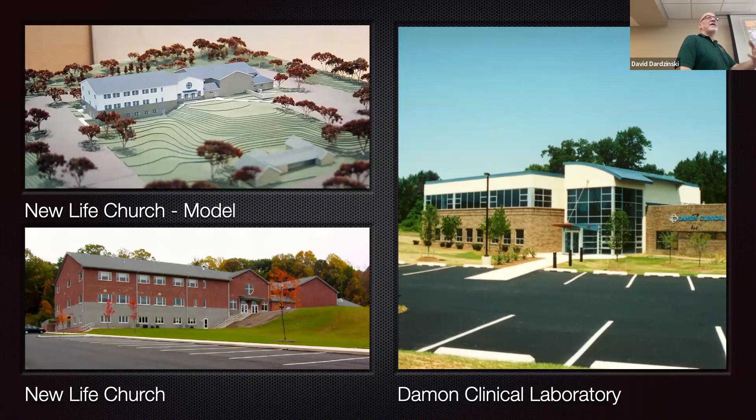This is an office building in Little Falls, New York. Car dealership—this is what it looked like before. Interesting story, there's my sketch there. After...

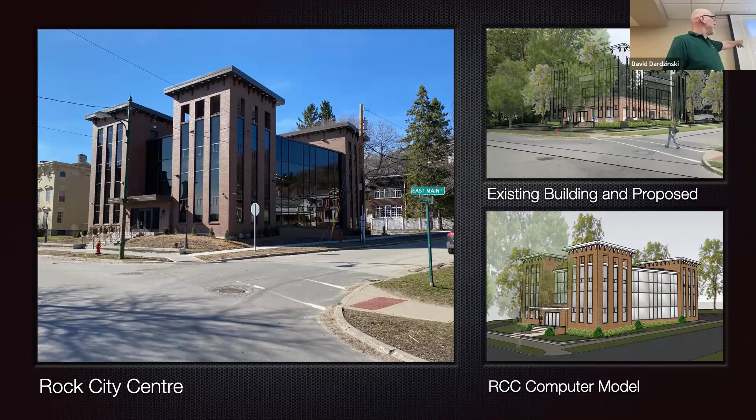And I worked for some large corporations, Toll Brothers. I was on a 200-unit, 300-acre development housing, and this was the original barn on the property. So we renovated that into a clubhouse.

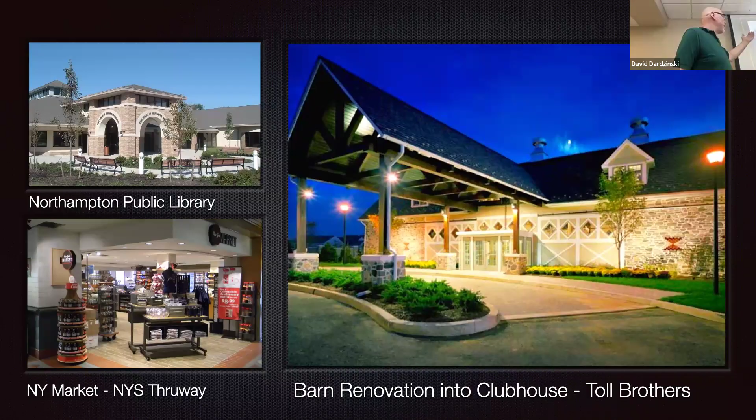Apartment renovation. There was a fire there, before and after. It's a duplex, well, two flats—apartment on the first floor, apartment on the second floor with a roof deck. That's on the Erie Canal, that hasn't been built yet. And there's a couple of apartment buildings, I think 4 apartments on an empty lot in Lambertville, New Jersey, on the Delaware River.

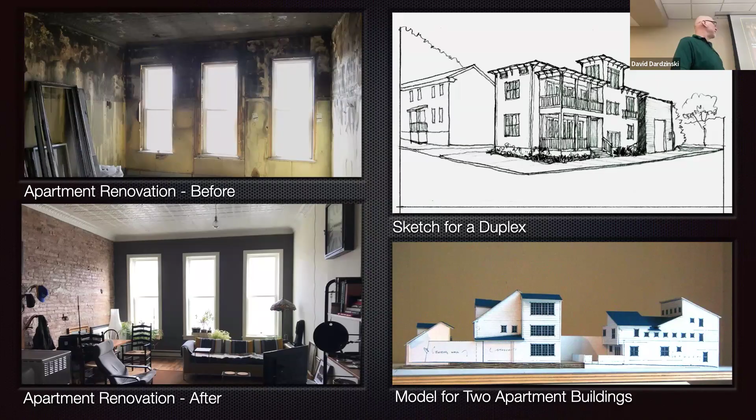This is a land bank project, Greater Mohawk Valley Land Bank. It's a trailer park, it's one of the existing trailers. They got a grant to replace them with zero energy modular houses. So what we were able to do, the state helped with, and the land bank, we converted their heat money—the money they're spending on heat and electric—because the zero energy modulars have no bills for heating or electric.

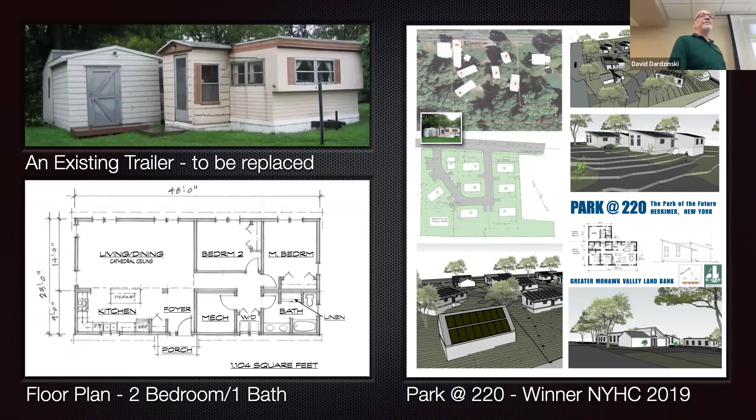Solar panels on the roof, some battery backup. So that became their mortgage payment. So instead of paying for heat, they're buying a house with that money. And that's under construction now.

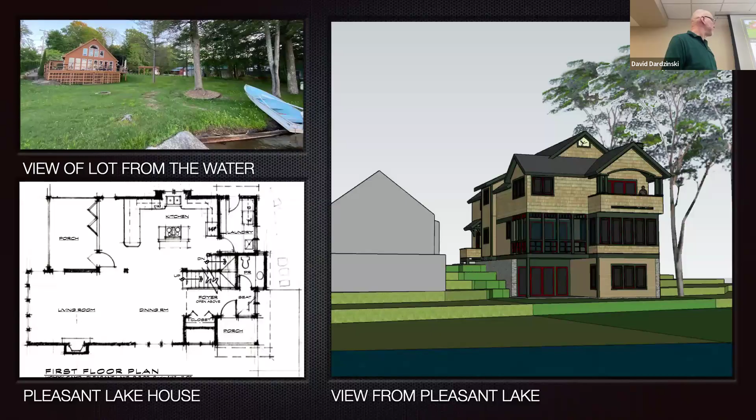So I present that to you because I've worked all over the country. I've worked outside the country. And I think, in my opinion, what Bruce Brownell has done with Adirondack Alternate Energy surpasses what I've done.

Bruce is sort of a local legend and a passive solar energy pioneer. Passionate about sustainable forms of energy, he has spent the last 60 years designing, constructing, and studying passive solar buildings, identifying the monetary and health benefits, and then sharing and educating students, clients, and the general public.

Bruce was born in Edinburgh, New York, which is inside the Adirondack Park on Great Sacandaga Lake. I don't know if you're familiar with that. It's north of Gloversville, Amsterdam.

He was born to a lumberman whose grandfather was also a lumberman. His grandfather had a mill on the Sacandaga River before the reservoir was flooded and became a lake. His father started a lumber business, Brownell Lumber, and Bruce worked there as a young kid. He also experienced construction firsthand because his father started building camps for vacationers coming up from downstate—two-bedroom cabins on stilts along the lake shore. Bruce was involved in that from an early age.

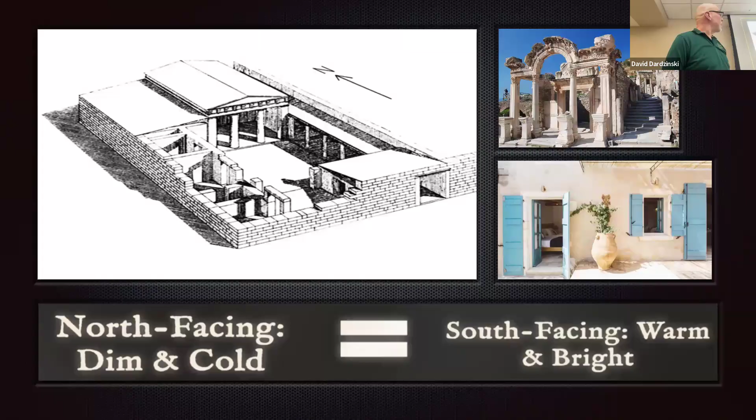The hypocaust transformed the building itself into a giant thermal battery, storing energy and releasing it slowly long after the fires died down. The Romans harnessed engineering mass and controlled airflow design, did not just heat a room, it heated 100,000 square feet at once with a single centralized system, which is sort of the precursor to our furnaces and ductwork stuff we're doing now.

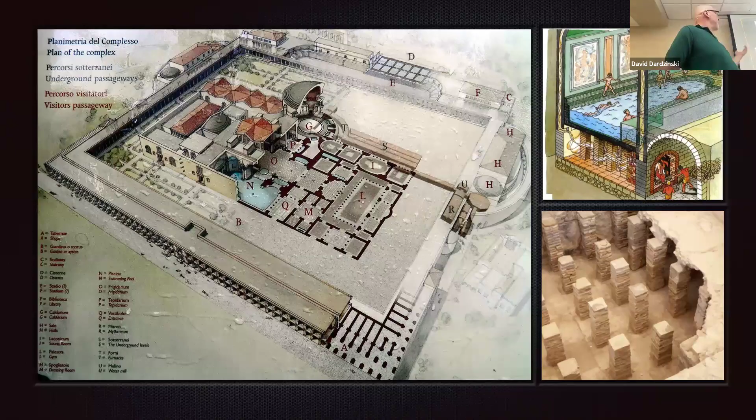So fast forward 1956, Felix Trombe took the ancient ideas and designed a wall using concrete or masonry facing south and placing just behind a layer of glass. Sunlight streams through the glass and heats the wall. It then slowly transfers the warmth and releases it long after sunset, smoothing out temperature swings without a furnace.

Field tests from the late 1950s and early 60s showed that a Trombe wall supplied between 60 and 75% of a home's winter heating demand in a typical temperate climate. All this without any moving parts or complex controls. The wall's mass acted like a battery, storing solar energy, then letting it trickle into living spaces as the air cooled outside.

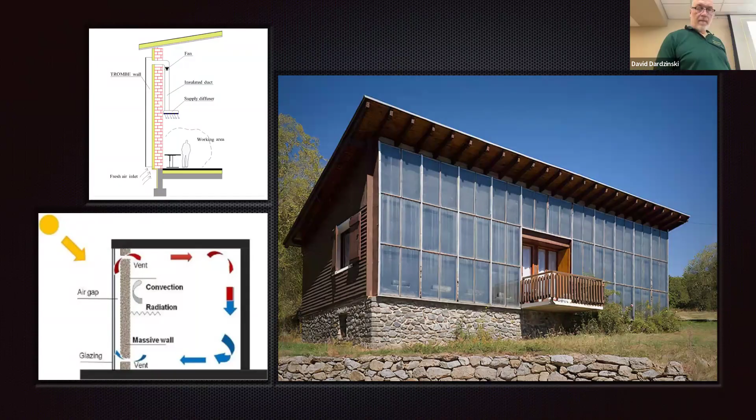Which brings us to the mid-60s and Bruce Brownell's designs. Bruce combined the ancient Greek practice of orienting to the southern sun and adding thermal mass storage pioneered by the Romans and advanced by Felix Trombe, where he also added the vision to make use of emerging technologies in building insulation and envelope sealing. This enabled him to reduce the overall heating demand.

Now, the house only needed occasional supplemental heat on the harshest days, which could be accomplished with a fire in a wood stove for a few hours. And this heat also would be stored in the heat energy battery.

Currently, with Bruce's design and the amount of insulation and sealing we have in the houses, we're at 15%, not 33% of glass on the south. We don't need that much, and it just overheats in the summertime.

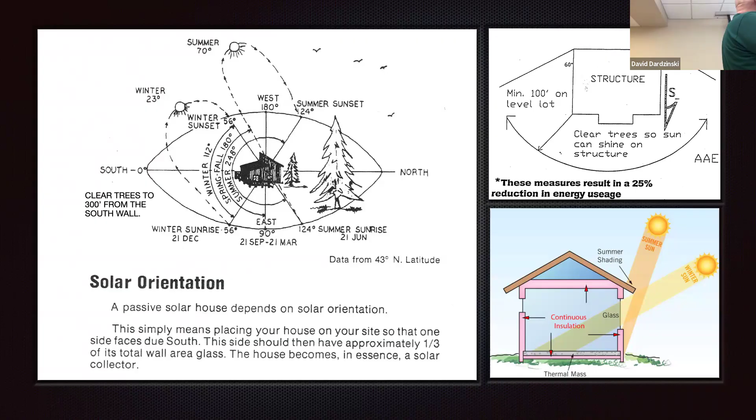And then there's a little section here. We do an envelope. Now, this isn't ours, but we do an envelope all the way around the living space, underneath the slab, walls, and we do the roofs. So we'll get to that next. But you can see where the winter sun comes down, comes through, heats the area. Summer sun, it's blocked by overhangs and just a steep angle.

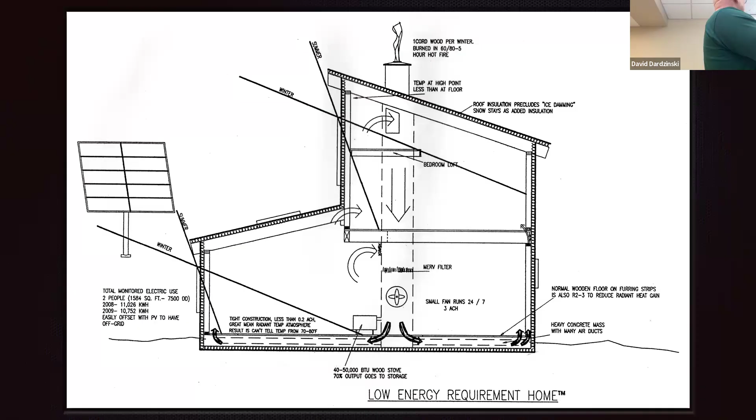So that's it. Basically, it goes 24/7. The fan runs 24/7. So the mass moderates the house. Typically, it stays between 68, 72 degrees year round. Now with climate change, summer's getting hotter. We've been adding some heat pumps. We put a coil in the air shaft for the heat pump to cool it down.

For the previous 40, 50 years, all you had to do was open the windows at night. It would cool the house down, cool the battery down, get up in the morning, close the windows, and it would stay cool because the battery's been cooled down. It's going to take the heat back out. But when it doesn't go below 78 or 80 degrees, that's as low as it's going to go. If that's what it says outside, that's what it's going to be inside.

So I've done a handful already of additional heat pumps. We did one geothermal. I think that was overkill, but.

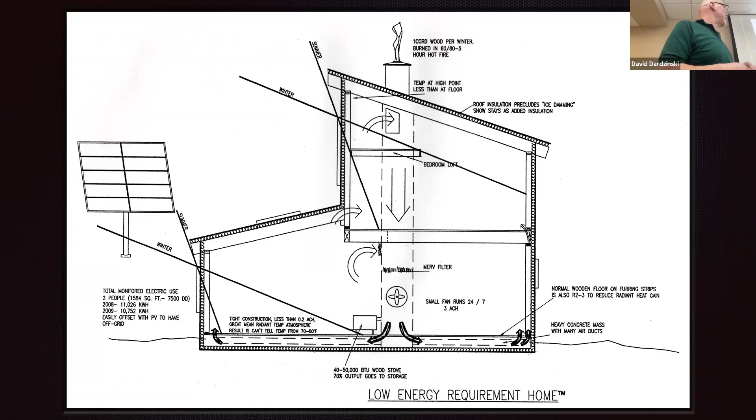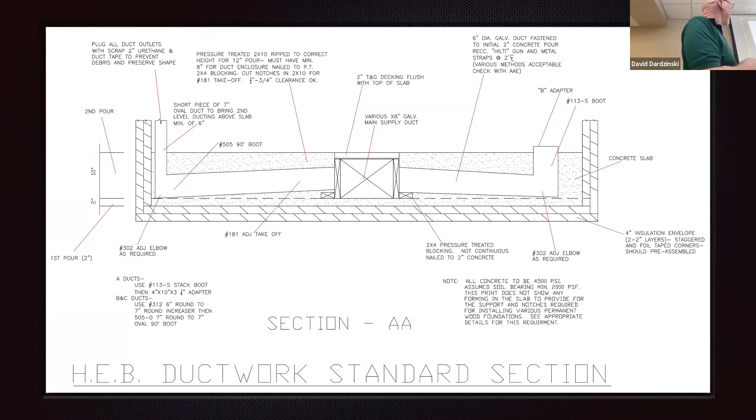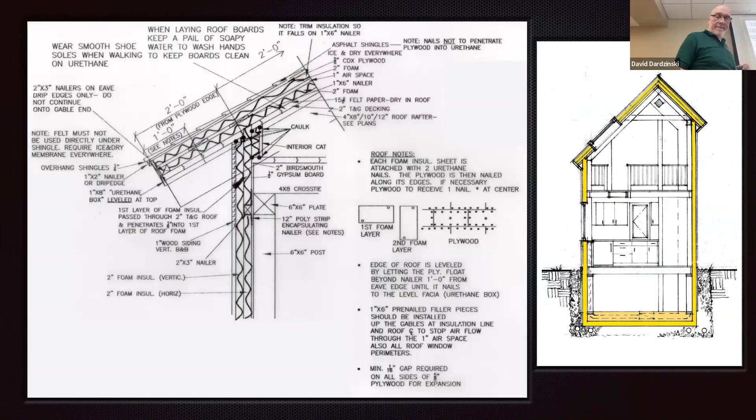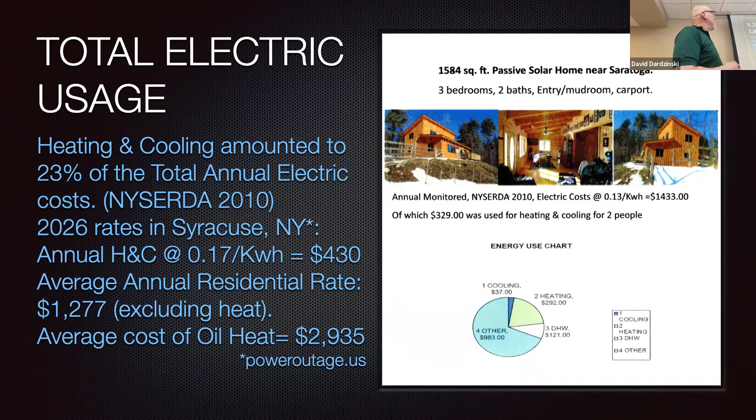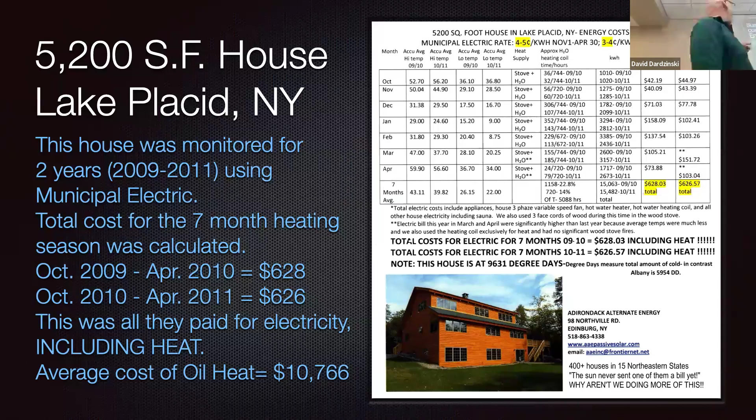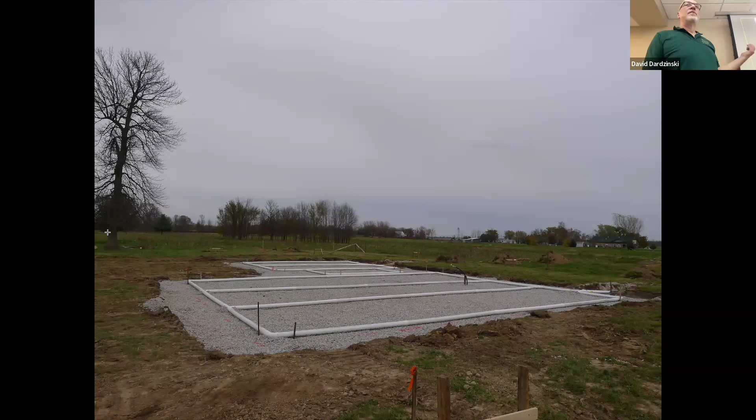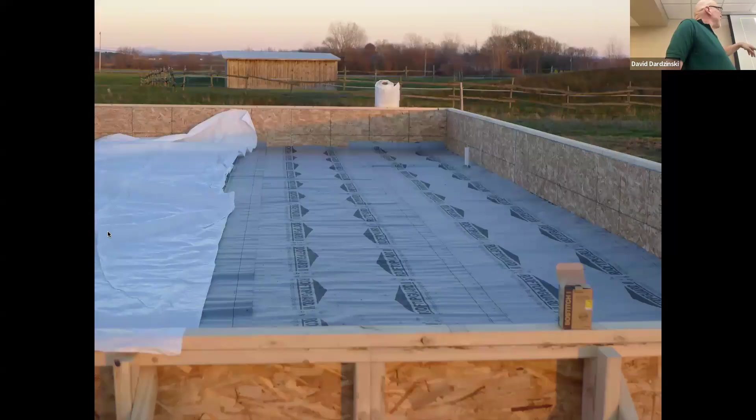Okay, so this is, I'm gonna say, about a 2,800 square foot house. So this is where we start. That's usually 8 to 12 inches of crushed stone with a drainage system on top of it. From there, we'll form up, put down a vapor barrier. This sheet is to keep stuff dry.

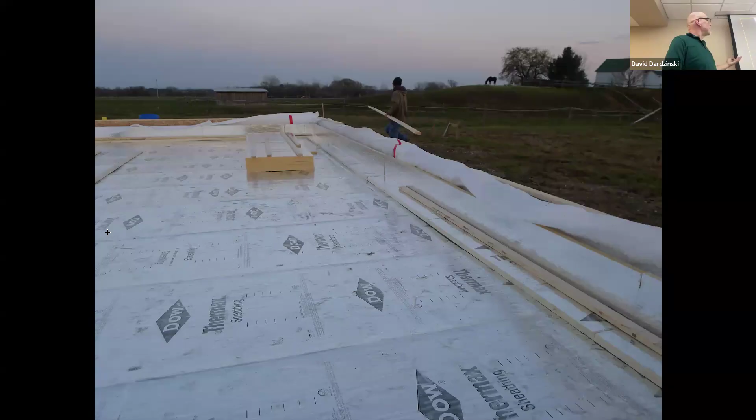Now we put down 2 layers of 2-inch rigid polyisocyanurate. So that's 4 inches total, which is roughly 28, 32 R rating. And you can see it's running up the sidewall there. See it going up there? Because that's going to continue right up the house. It's continuous.

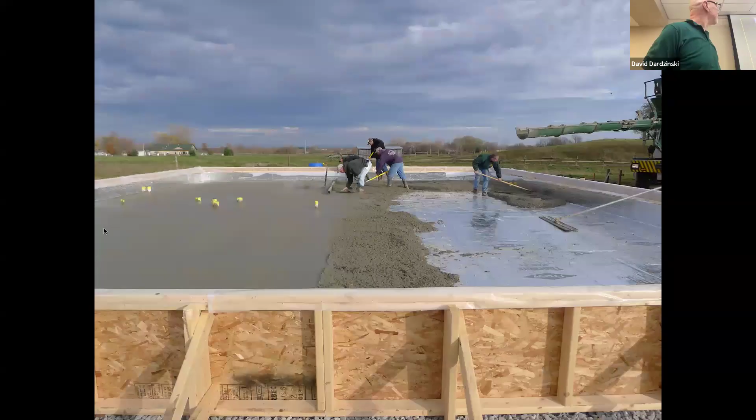So now they're putting down the 2-inch slab that the ductwork's going to be mounted on. So this is 2-inch all the way around. You can see there's some drains in there already for the plumbing.

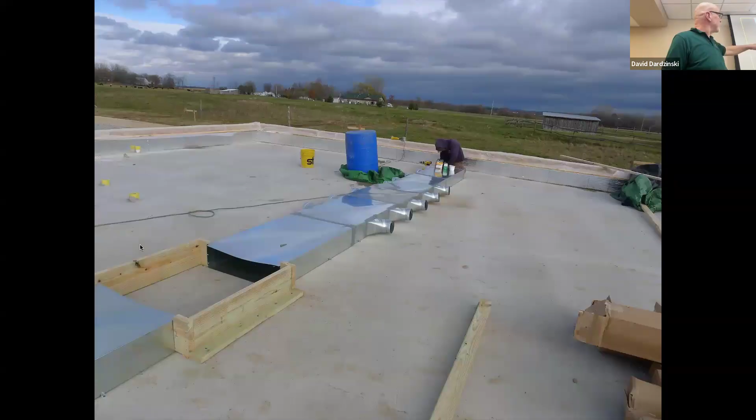So now the slab's down, and this right here is the return air shaft, roughly in the middle of the house as best we can do. This is the main duct going out here, and you can see all the takeoffs there that will run out to the exterior walls and then go up, whether go into this floor or go up to the upper floor.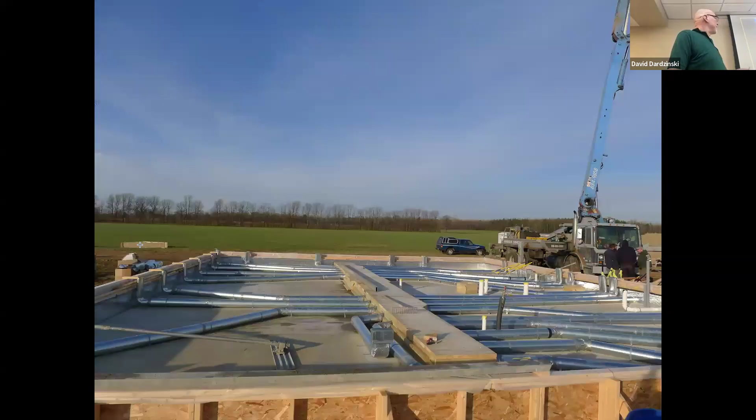Here's a shot with all the ductwork in, all the risers going up. See them there, over here, with short ones that are going to be serving that first floor or lower level. Now, this plywood here is going to be the top of the slab. So form right to that. That way, if there's a problem, can always cut that out and get down in there.

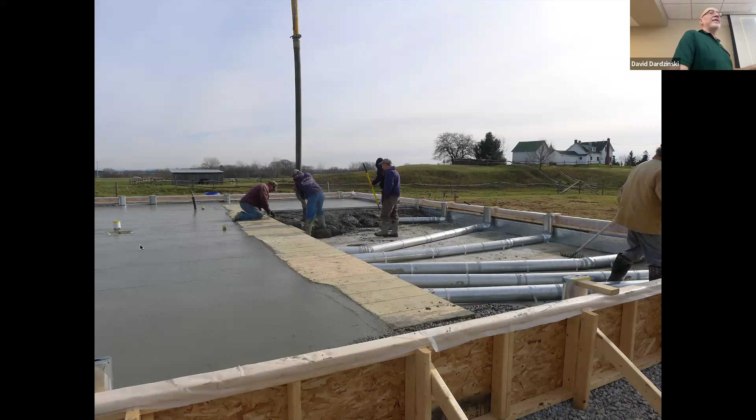And in 60 years Bruce has been doing this, we've only had 2 houses that had a problem. One in Valatie near Albany that I dealt with last year. The third owners bought it. Second owner abandoned the ductwork, took it out, and wasn't using the battery. And the house was not very comfortable for the new owners and their 2 kids. So we reestablished that, and that ductwork was full of crap. Toys, mouse nests, all kinds of stuff.

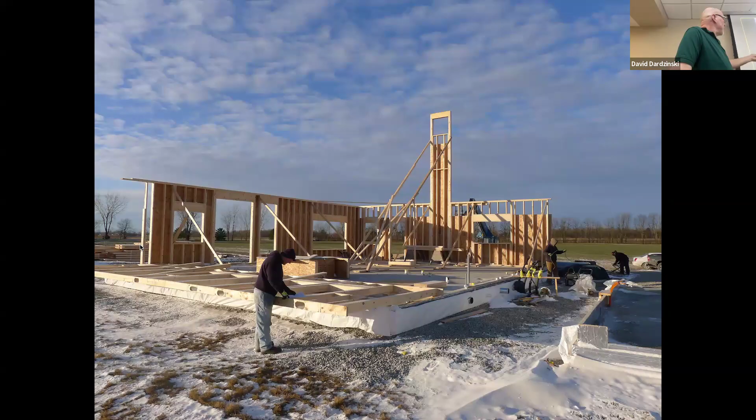So now they're framing up. You can see here, they cut the holes already for the ducts in the base, in the bottom plate. In this instance, we're using 2x6 walls there. Now, even though we have that as a standard detail, most of his houses are post and beam. We're not going to insulate in those cavities because we're insulating outside of that. Our vapor barrier, moisture barrier is outside of all the wood.

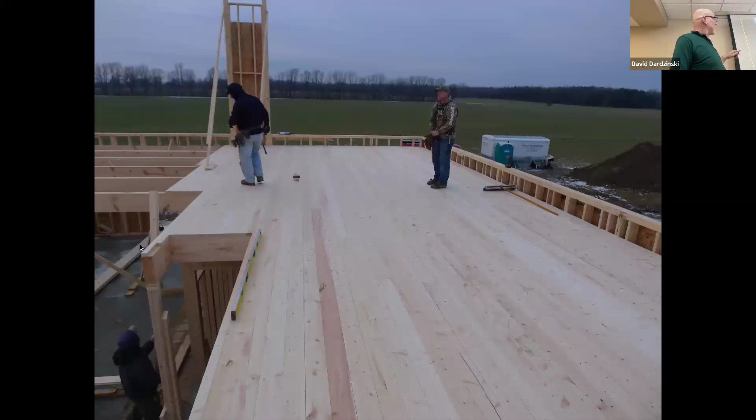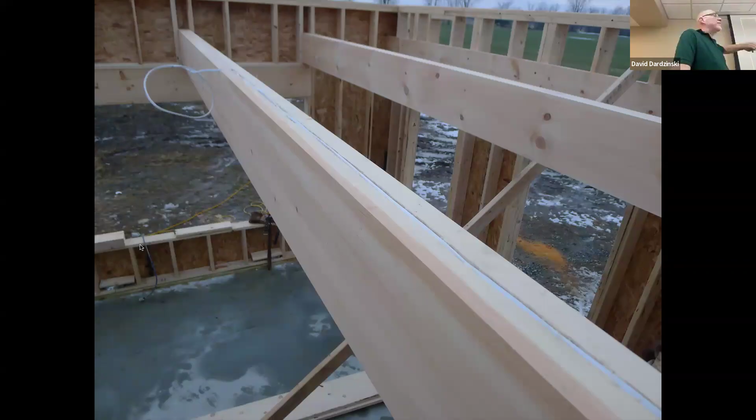So here they're putting decking down. This is a 2-inch or maybe 1.5 inch flooring for the second floor. I think I have a better picture, but you can see right there, that wire for lighting, that is actually led into the top of that 4x10. Oh, there it is, yep. So they used to be able to just put the floor over top of that, but with more current codes, we're required to put a steel piece of sheet metal over top of that before the floor goes down. Protect that from a nail.

Now in this house, we used attic trusses over the garage. Bruce is a huge proponent of having that bonus room up there. In fact, he ran plumbing, water lines, electric, everything to have another bathroom for an in-law suite or a guest quarters with an exterior door. And you'll see that as we go through. There's overframing to give the overhang on the gable end there. So the trusses are there, and then it switches here. The gable truss is shorter than the attic trusses.

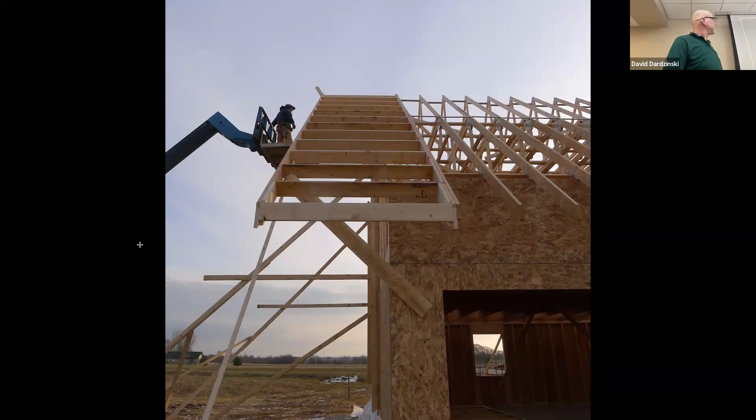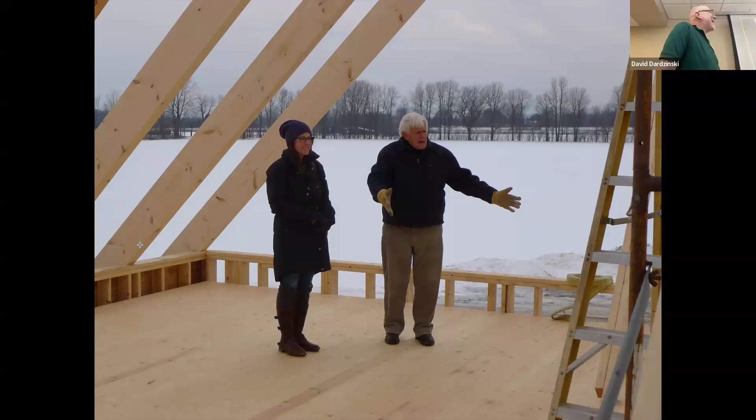So here's a shot. So this is the connecting link here between the house and the garage. So this is all going to be completely sealed, 2 layers. You can see there's snow on the sheathing out there. But this is 2 layers here going all the way around that gable end, up these walls, across the top, back down again. All in the exterior of the building. There's Bruce explaining something adamantly, and the homeowner.

So this is that section here in the detail where you'll see later on the insulation is going to come up here and go all the way up to meet the insulation on the other side of the sheathing, roof sheathing.

Pretty steep roof. I wouldn't want to shingle it.

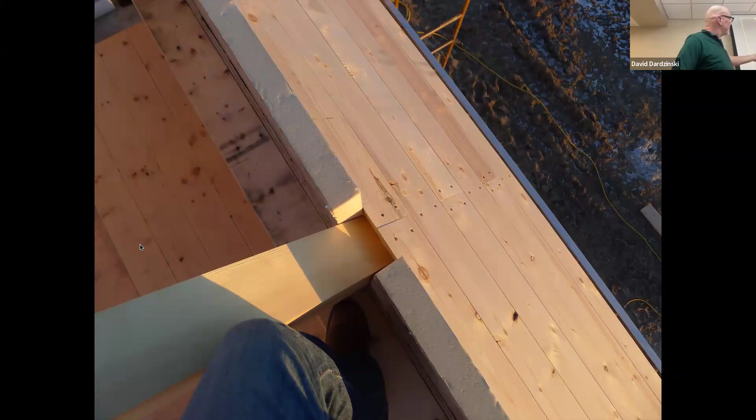So here you can see it. That exterior insulation is going all the way up and clearing the rafters, so that when the roof sheathing comes down here, it stops on that side and picks up on the other side. It's kind of hard to see there, but you can see it. That's the insulation there coming up, and they've already put the roof deck on up to that point from the eave.

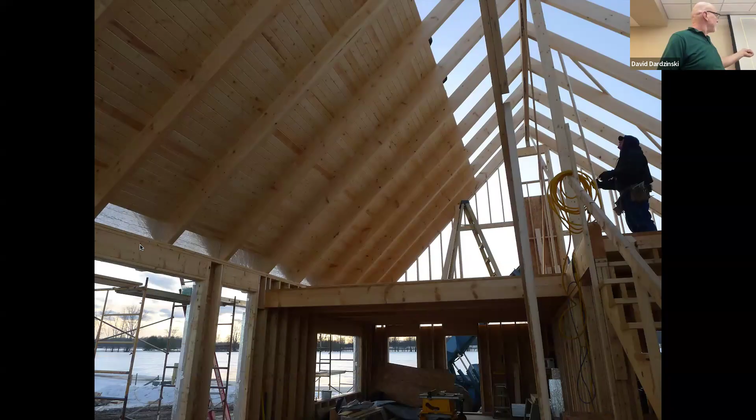And here it is inside. You see it going up there. Now, there'll be another layer on top of that on the inside, just to make sure we have a good thermal break there.

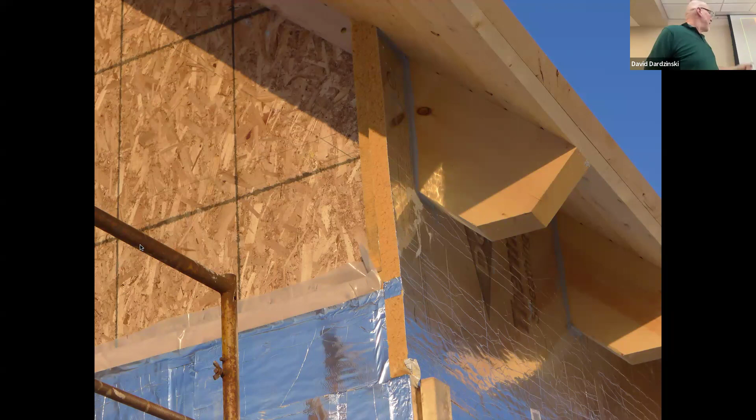So here's a shot of the corner. The first layer goes in, butts into that layer, and the second layer overlaps that layer, and this second layer will overlap that layer, and these will all be taped corners. I think this is here for a roof and a deck. You'll see that later on. They're working their way up the side there with the insulation.

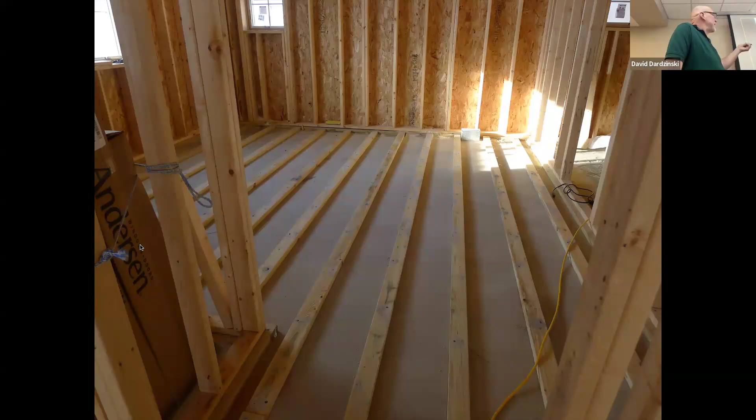So this is a detail that Bruce does in all his houses. People say, oh, well, your floor is not going to get that solar gain because you got those sleepers on there in the wood floor. Well, we're not counting on the sun hitting that and warming it up. We're warming it up with the air through the ducts.

And this allows us then on a slab-on-grade situation to run wires through there, electrical wires, data wires, whatever we need to do in that space, because that's 1.5 inches deep there. So in those areas, you can run a wire up through there to get to that wall, or if for some reason you need a floor outlet somewhere.

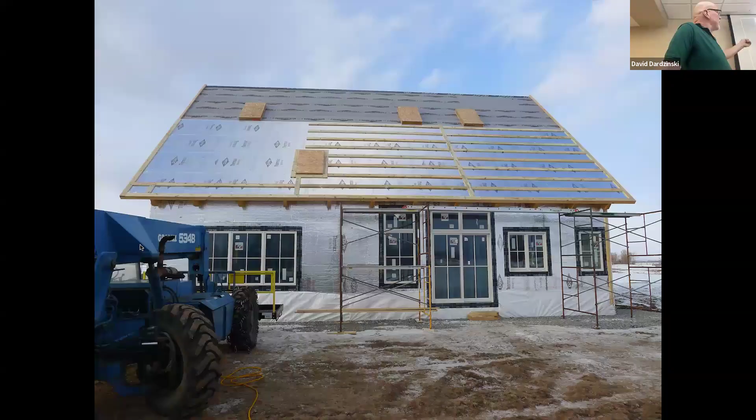So here's where they're doing the detail I showed you before with the 1x lath on top of the first layer. Those sheets get 2 nails into the sheathing that's on the rafters, which on this house is going to be probably a 2-inch tongue and groove. Then the lath goes through there all the way up, and those are covers for the skylights. They have to be packed out so you can frame to them, so you have something nailed around the holes in the insulation.

And then the next layer will go on top and it'll just get nailed to those and not all the way through. So you don't have to have 4.5-inch, 5-inch nails to attach the insulation, even though you're only doing 2 per.

So here's the sheathing going on with the second layer. You see the 2 layers there. So they put the insulation on and then the sheathing right on top of it as they work their way up, so they don't damage the insulation, put any dents in it or break the foil.

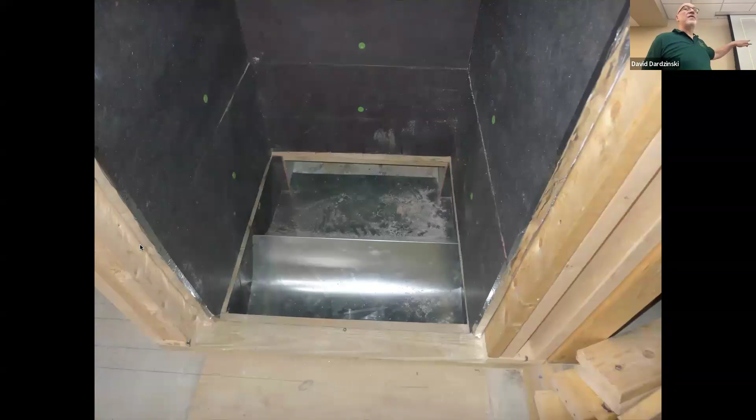So this is the air shaft, and that's the main duct going through the concrete. And this is a splitter, directly below the fan. It diverts the air to both ends of the house, east and west, I think, in this instance. And that is put in with just 2 screws, so that after a while you can adjust it and balance the system. Moving that like half an inch will make a huge difference in the volume of air to either side of the house.

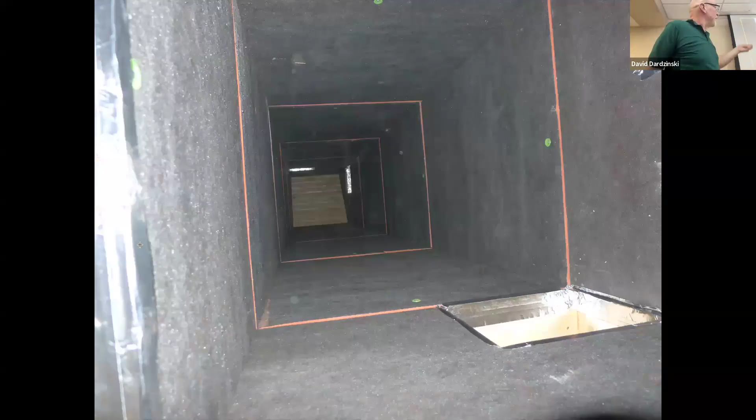There's, looking from the bottom up, one of the grills that gets the return air. So that's the top up there. There's 2 grills up there at the highest point to pull the air from the peak, the hottest air. And then this one is here for the wood stove, so that would be louvered.

So when the wood stove goes on, open it up, it sucks the hottest air right down and heats the battery up very quickly. So you don't have to stoke your stove for an 8-hour or 10-hour burn. 4 hours, 5 hours, after dinner, you have a nice fire, let it go out. That will heat the battery enough to keep the house warm.

What material is the interior side of the shaft? This is a sound batt insulation board to reduce the noise from the fan and to keep it clean in there and seal it really well. There should be some shots of the air shaft with the equipment in it as we get farther along.

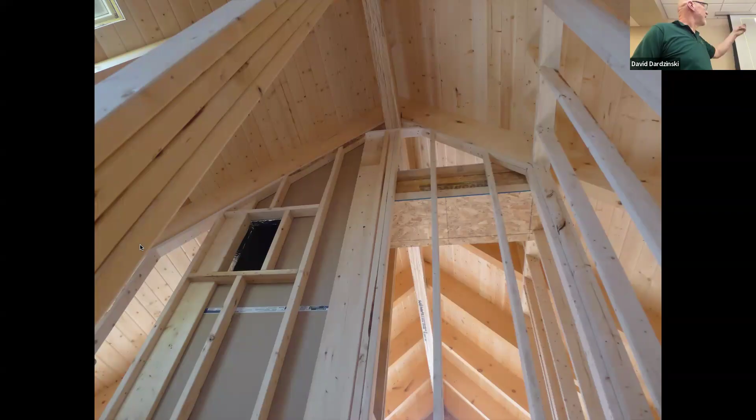That's the king post there, and that's the air shaft. So we do ridge beams as opposed to ridge boards. Are you familiar with that difference? A ridge board is just keeping the rafters from pushing against each other. A ridge beam is actually holding them up. It's a structural member, so you can have the framed one side without the other side. If you have a ridge board, you have to frame it going up so they oppose each other so it stays in place, or you get a crooked roof.

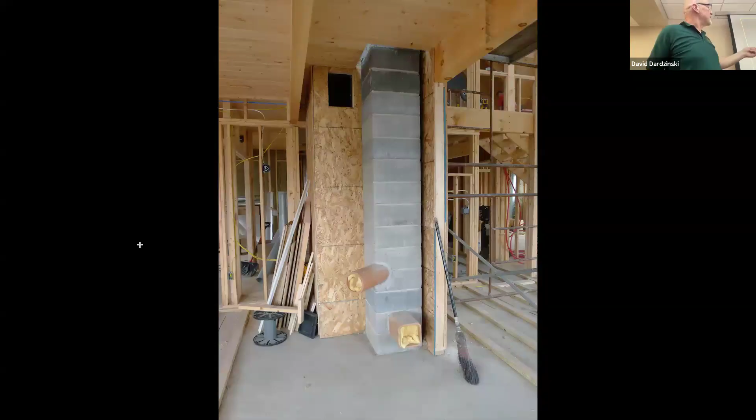So here's an example. The water lines are run through that space and up the wall. There's the ductwork going up, coming out of the slab, and going up to the second floor. It's hard to see there, but there's the duct going to the windowsill. I'm sure I have a picture of a window later on somewhere. This is the chimney for the wood stove, and right there's the air shaft. That's going to get built out as well and finished. All right, you'll see in later pictures.

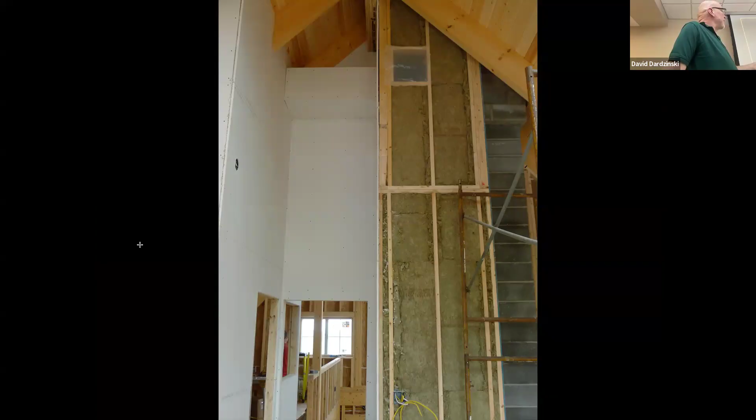Oh, so you can see it's like a rock wool there, the insulation inside the air shaft. There's the chimney right there, and there's the opening for this side.

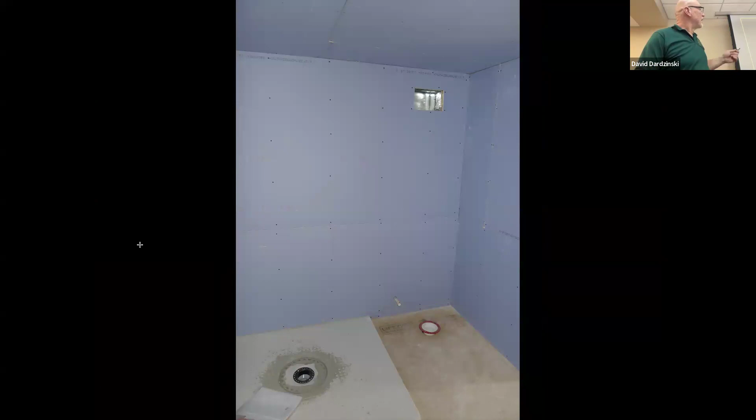So this is a sound box, as Bruce calls it. This is the bathroom. There's no exterior ventilation. We just allow the moisture and heat and smells from it to go up to the peak and get sucked down through the filters. Bruce specifies MERV 13 filters now for the house. There's 4 of them in a pattern, and he instructs the homeowner to start with 4 new ones and then every month replace 1. So you need 12 for the year, I think. No, 15. But in order to keep from transfer of noise, he designed a little box that's lined with sound batts, sound insulation, and baffles, so that the air can transfer from here out into the next space without noise transferring, sounds, voices, bathroom noises.

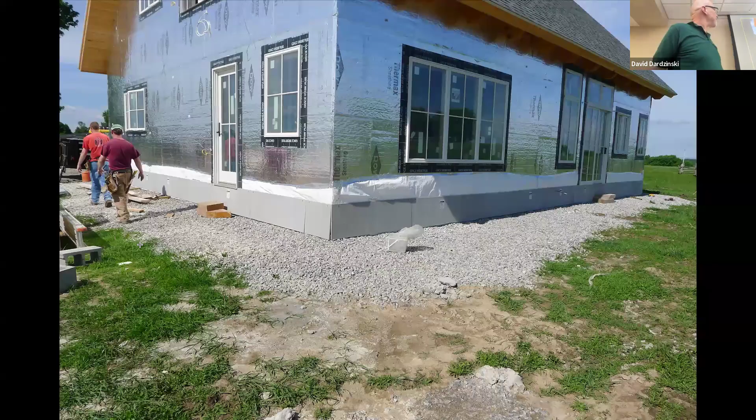So here they're preparing for a deck. That's a HardiePlank type material, or a backer board, tile backer board, depending on the job, to protect the insulation from the deck and moisture underneath there, because we don't want to run the wood siding down behind there, as that's going to cause problems with dirt getting in there, moisture accumulating. This way, that's going to keep that from any rot happening there.

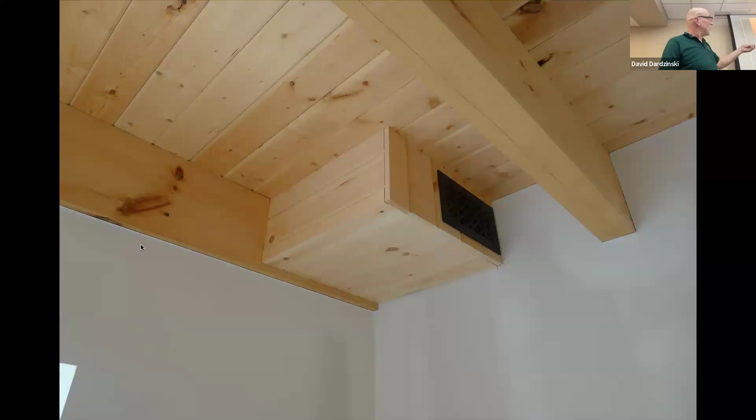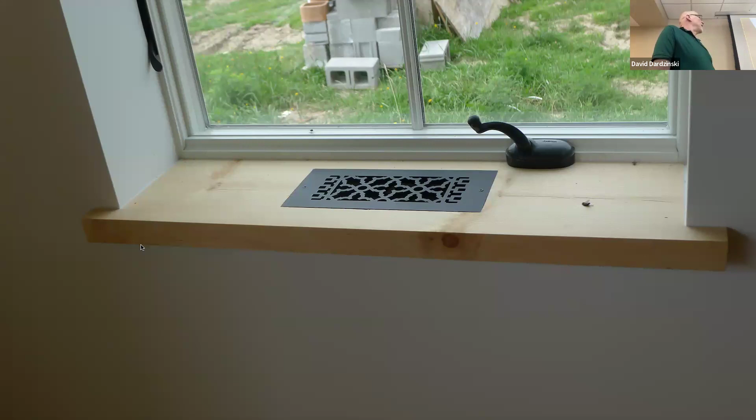So here's one. This is the other side of the wall. So inside, the opening's over here, and out here the opening's over here, and there's a baffle in there, and that's all lined with sound insulation. So it minimizes any transfer, any bouncing of the sound, but the air comes out, gets out, and goes up. And here's the vent in the windowsill, so that's going to warm that window up all day long. So when you walk by it, it won't feel that cold air like you would walking by these. No offense.

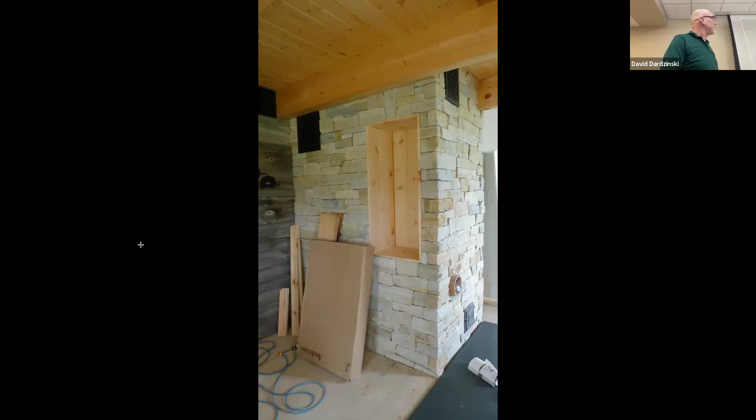There's the finished fireplace air shaft. Now they've got 2 grills there, and there's the outlet for the stove chimney, and the ash pit for the chimney as well.

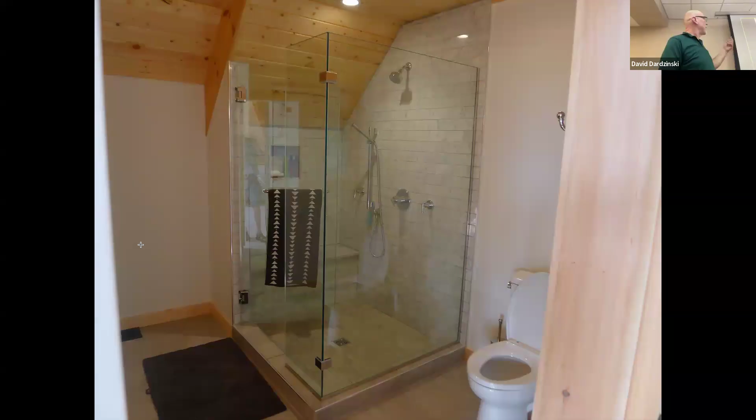Just some interior shots. Shower.

I haven't met that guy.

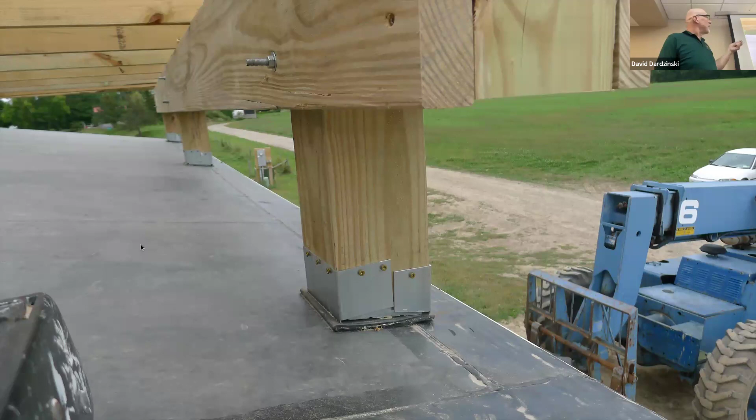So this is an interesting thing that Bruce does. This is a roof deck, so this comes off the master bedroom. It's installed so that that Lull can take it off. So this is built on the ground, and it's set on top of that roof after it's completed, the deck is. And then if you ever have to repair that roof, you just rent the Lull, you come back in, you lift it off, put it on the ground, fix the roof, put it back again.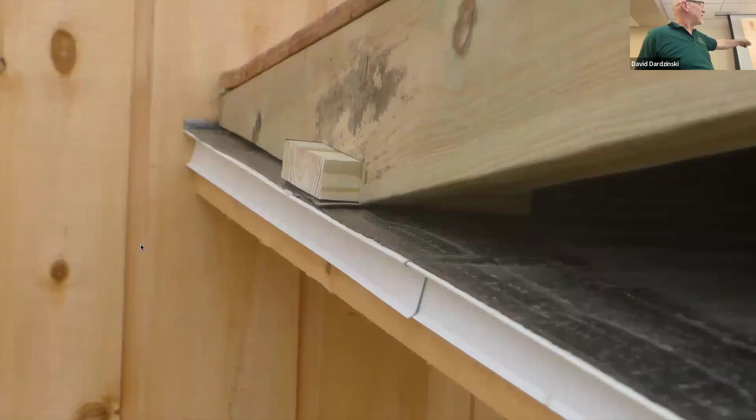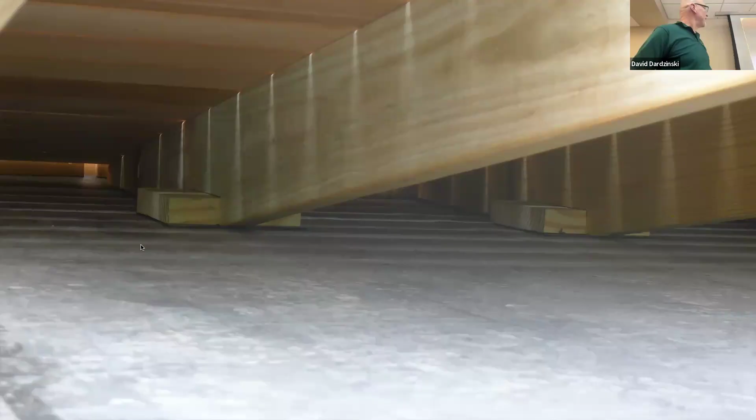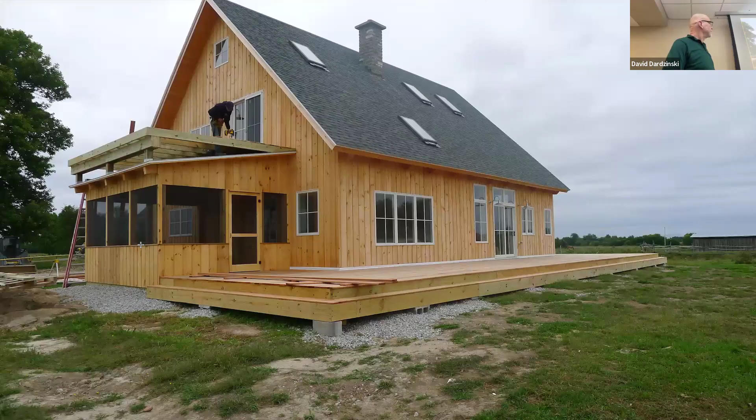Here's cleats. These cleats hold it in place, so that's the only thing that's attached to the roof. And those rubber sections down on the previous one have a pin, that bolt that runs up into the 4x4, so it can't move around. There they are underneath as well. So it just goes in, slides across that and drops down. There it is up there. And you can see where this is where that Hardie board or tile backer was across here.

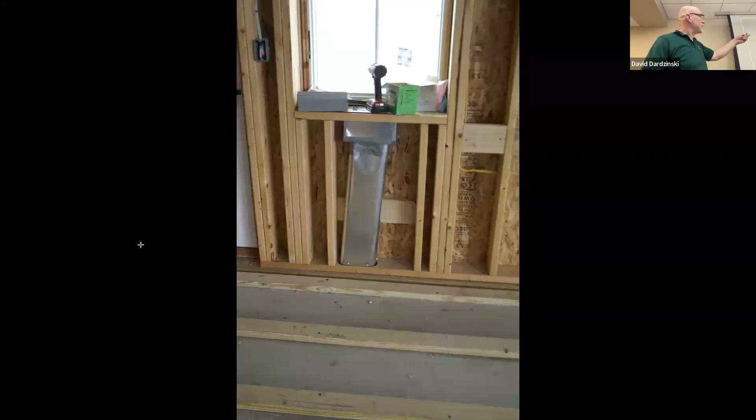Here's the air duct going up into that windowsill from the energy battery.

Kitchen again. So this is a second floor, and there's a sleeping loft up here. There it is.

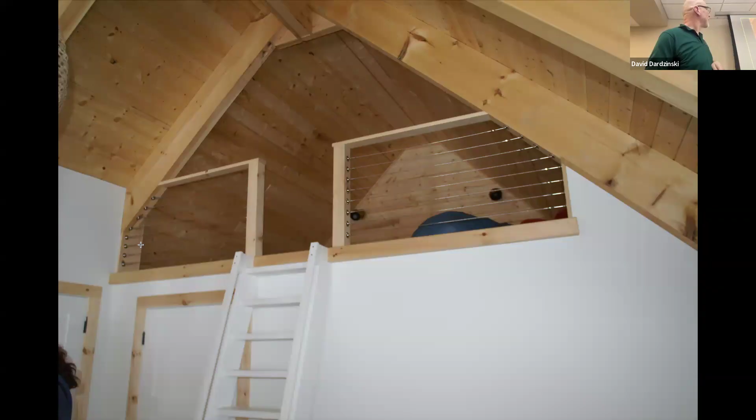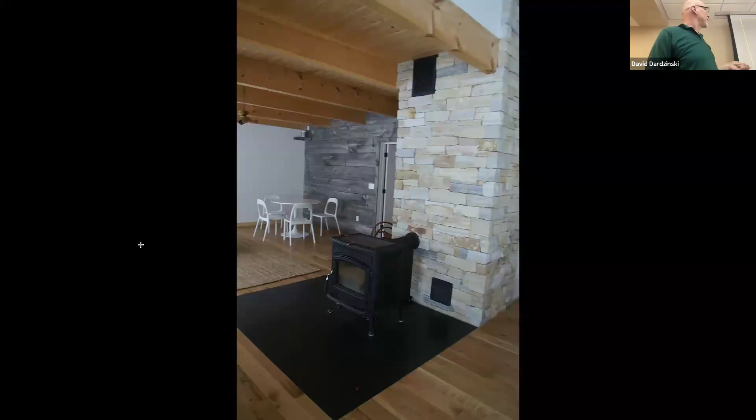Now this house has a coil for a heat pump right there. It also has a damper that closes when the heat pump turns on, to force more air through the A coil, because it's not the whole size.

The air shaft is 36 by 36. The A coil's probably 24 by 24, like that, 18 by 28. So we put a damper in there that's open all the time until the coil comes on, and it shuts down, forcing more air through the coil. More efficient.

Again, there's the wood stove. There's the grill up there to capture that heat and get it going right down into the battery before it has to go all the way up to the ridge.

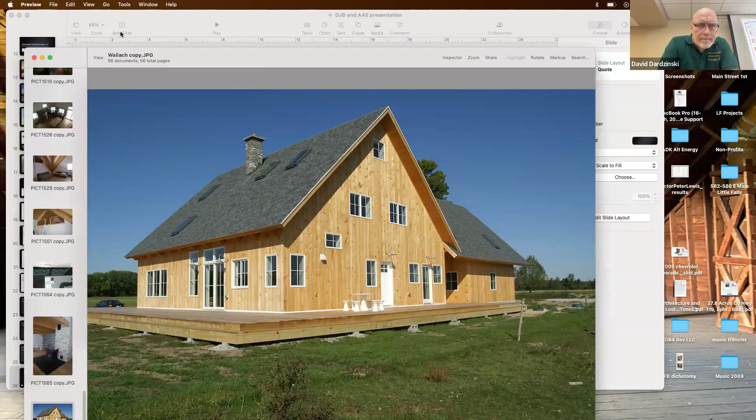Other side of the house. That's it. Let me see if I have that other shot. Here we go.

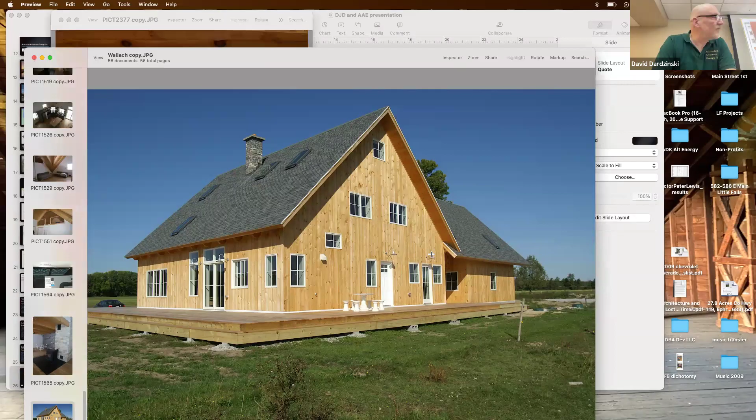So this is something that Bruce does. This is a porch, an alcove in the house where it's recessed in. I believe that window is in the bathroom, and this light is over the door downstairs. He puts a skylight in here to provide light for that window in the bathroom.

Any questions? Any comments? Because everybody seems to be still awake. Yeah.

Probably about 10 years ago, Bruce did some cost comparisons. At that time, a code-compliant house versus his house was about 15% more expensive for his house. But it's not apples to apples.

If you want apples to apples, compare prices against the passive house, since they're doing this stuff with high-tech things. I did it on that zero energy modular project where we had ERVs. The house was so tight.